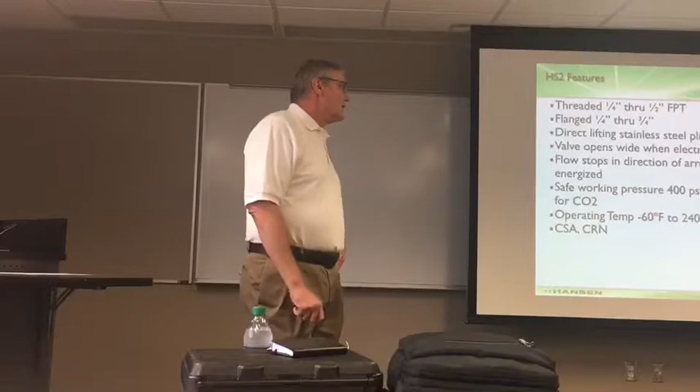The smallest one, the HS2, is available in 1/4 inch to 1/2 inch threaded connections, or we can do flange up to 3/4 inch. This valve is direct acting, so when we energize the coil, it lifts directly off the seat, and the flow is stopped in the direction of flow, shown by the arrow on the valve. Most of this is the same across our valves, so I'll talk about it once.

400 psi is our design pressure for standard ammonia products, and 600 and up for CO2 products. We'll usually handle minus 60 degrees Fahrenheit up to 240, and we have some certifications if they're required.

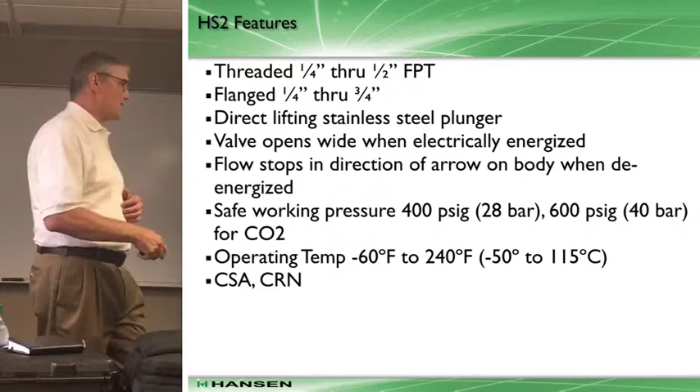So again, this little one is direct acting. Just so you get the lay of the land, the red side is the high pressure side, and the blue is the low pressure side. So we're stopping in the direction of flow. Here's the seat. This is all at high pressure. The spring force plus the pressure over an area causes a force downward to make the actual seating of the valve.

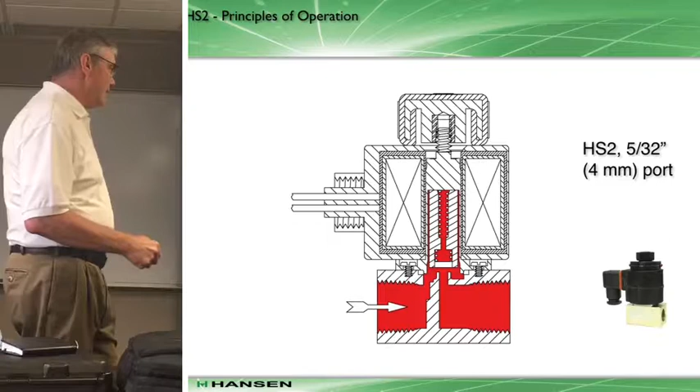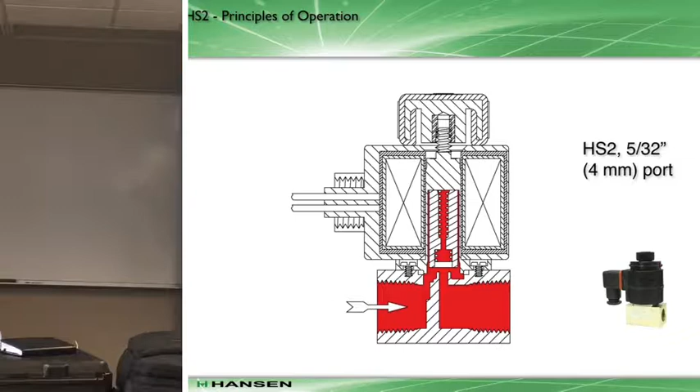Once we energize the coil, it creates that magnetic field, lifts the plunger up, and then we can have flow across the seat of the valve. Very simple, right? Direct acting, nothing fancy. You get it energized, it makes the electrical field, and you pull the thing open.

The HS6 is the next one, a little bigger, but we still come in as a flange valve at 1/4 to 3/4 inch sizes. Again, FPT, weld neck, socket weld type flanges are available, and it's direct acting. The seat opens wide when it's electrically charged, like we saw on the other valve, with flow in the direction of the arrow. Same kind of working temperatures and pressures.

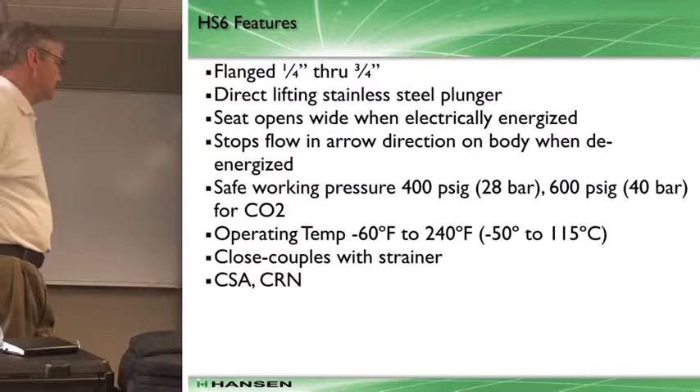But on this one we introduce a close coupled strainer on the valves. They have what we call long bolts through them that close couple the flange, the strainer, the solenoid, and another flange. So these are separate components - I've had people send me pictures asking what this part is. No, it's all bolted together as one piece.

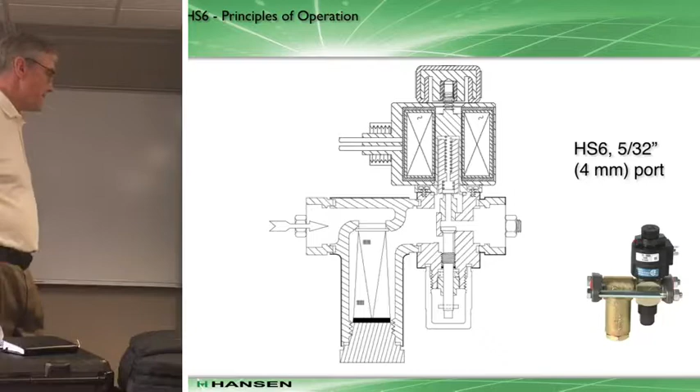Again, high pressure in the red, blue is lower pressure. Usually you need a minimum of about 2 pounds pressure differential to get these to lift. So it's stopped - spring pressure closes it, plus the force of the high pressure liquid causes it to seal.

Piloted around it? No, this is not a pilot, it's direct acting, not this one. This is just a liquid or a gas that would come in here. It would skirt - there's some clearance here along the plunger, and it gets up here to the top, and this is a hollow member where the Teflon sits, and it's all under this high pressure. It's just direct acting. Does that answer your question? Yeah.

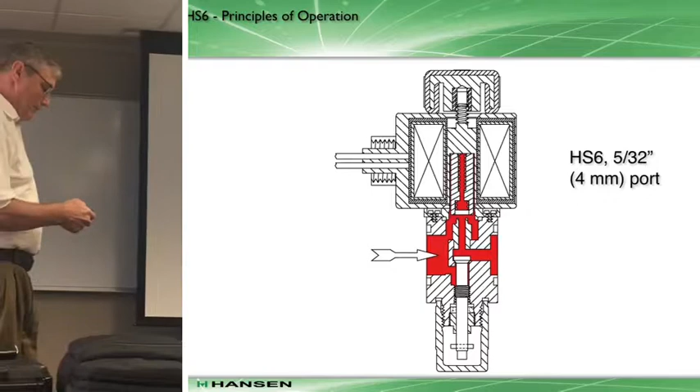So once we energize the coil, the magnetic field is generated, it lifts the plunger, and then my main seat to the valve is open, and I can get flow across it. Easy, right? Direct acting, it doesn't get much simpler.

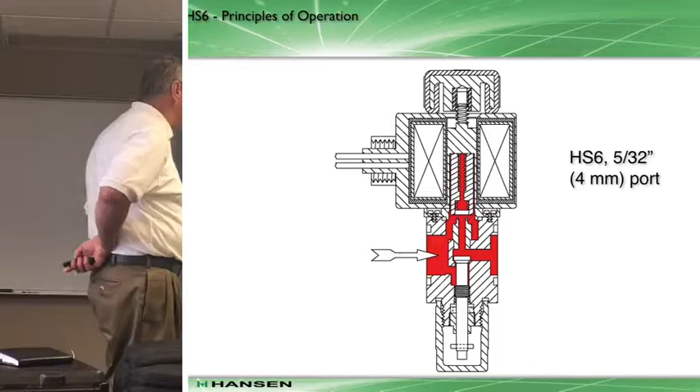The HS8A is a 1/2 inch ported valve, with 3/8 inch flanges to 3/4 inch, and welding line is starting to be available in this size, but by far most of the valves are flanged in these small ones. But here we start pilot operated operation in the valve. We could make all solenoids direct acting - we'd just need coils about this big to lift the plunger, 3 or 4 inches - but we just don't do that.

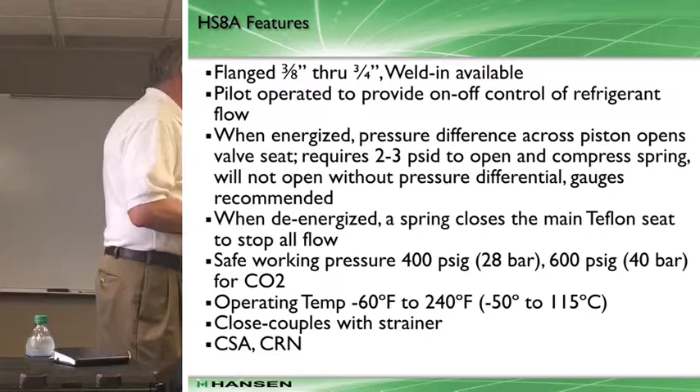We use a pilot operation, a small port to direct a much bigger port. So we'll see how that pilot operation works to control the on-off function. When we energize it, we create this difference in pressure, and it works and opens the main port—I'll show you how it works with the drawings. Then when we de-energize, the spring plus the closing pressure of the high side puts a tight seal on it. Same working temperatures and pressures as the other valves, and again, close coupled strainer on it.

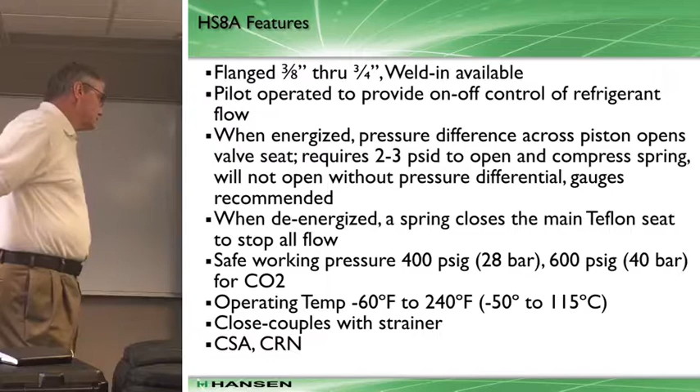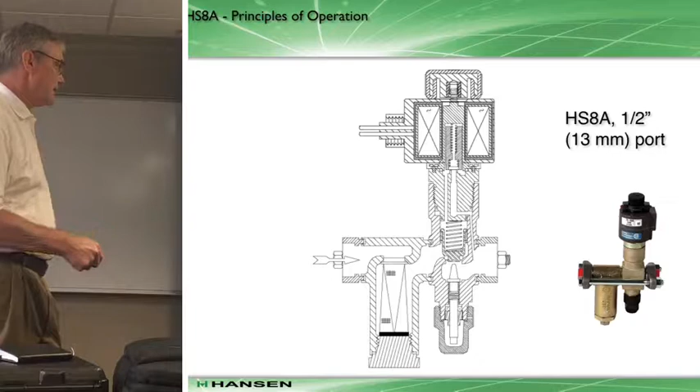So here it is, close coupled strainer. The manual stem is still on the bottom on this one, but this one, the manual stem works directly on the seat disc to lift it, and then we open the port to get your manual open operation if you're doing pump out or service work on the valve. So two things you'll notice: this is the pilot port, the small port, and it works to operate the much bigger, larger main port of the valve.

So again, high pressure in red, low pressure in blue. This is all at high pressure here. You can't see it, but there's a hole in the wall of this disc. So the liquid or gas pressure comes in here, fills this chamber up, and spring pressure plus this pressure, over an area, causes that thing to be forced down. It's all in this area at high pressure, but since this is closed, it's all going to stay seated. Spring pressure plus the high pressure flow keeps it closed.

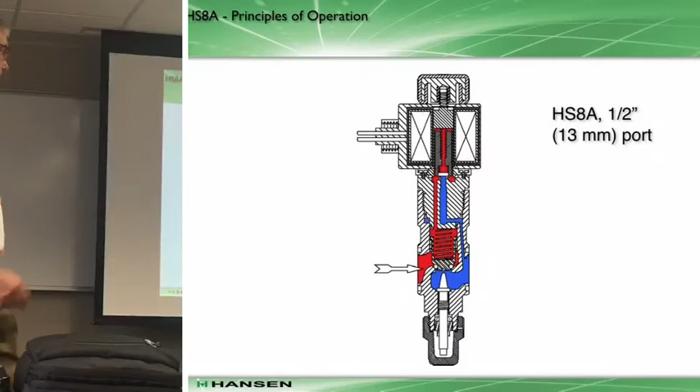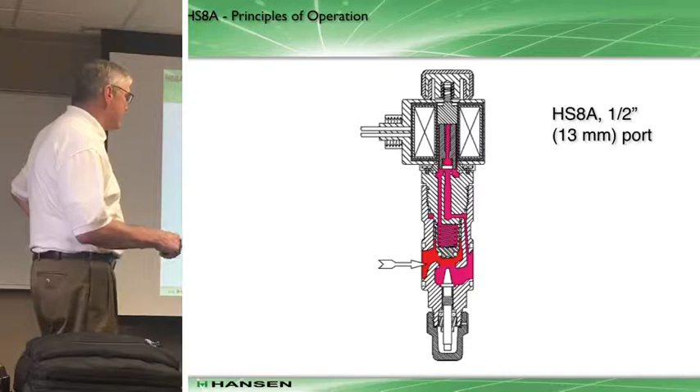Once we open and energize the port—energize the coil—this plunger lifts up, then it starts to open this, and it bleeds all this high pressure down to low pressure. So once that happens, we have to overcome the spring pressure, but the pressure on this side works on the areas here and forces the disc seat up, and then we get the main port to open. The next slide will show the next series of valves, the HS7.

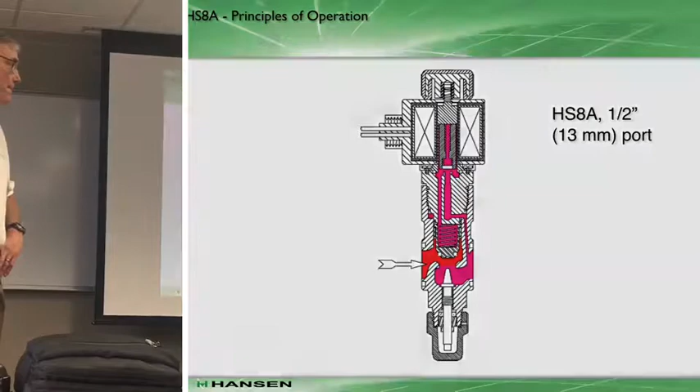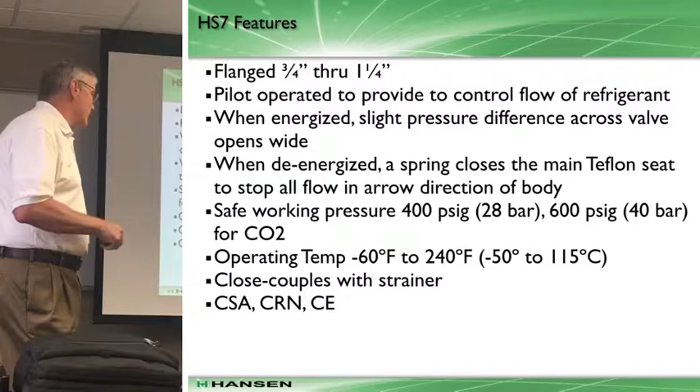We'll show it a little better because it's a bigger valve. But the important thing to note is, again, we've got to get things right at my pilot operation to make sure my main port opens up. So all the rest of these are pilot operated type valves: energize, slight pressure across the valve, make it go wide open; de-energize, the spring plus the closing high pressure force closes it up. 400 to 600, minus 60 to 240, all that stuff stays the same, and we're still providing close coupled strainers.

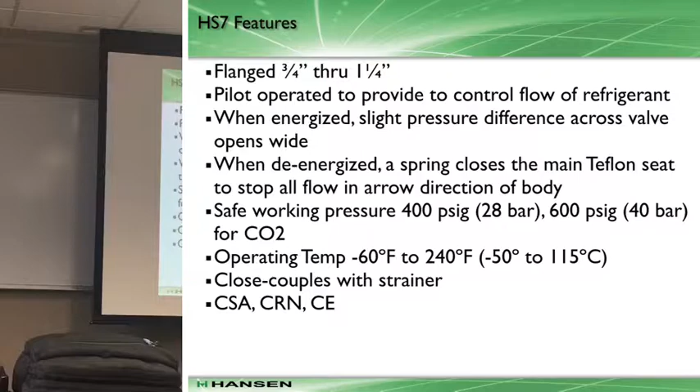Wrong button. Come on, baby. Doubled it. Patience. There we go—technical problems. Got to get these buttons right and get it facing the right direction.

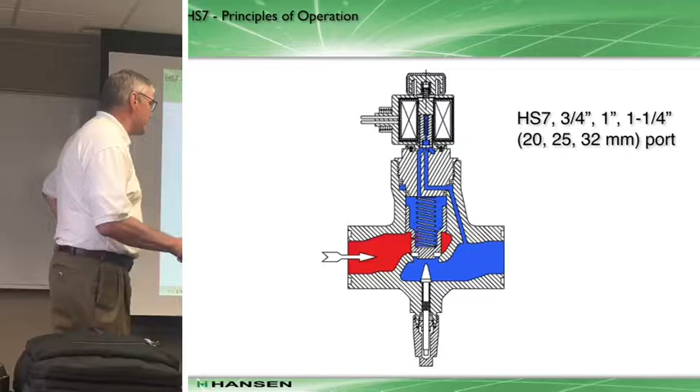But once we energize it—energize the coil—we lift the plunger up, it bleeds all this volume of gas or liquid pressure down to the low side. And then my high pressure works on these areas here to start lifting the seat off the main port. So this area and this area overcome that pressure, overcome the spring pressure, and then it lifts and my main seat gets open.

So pretty simple, right? We got the internals pretty much down. No questions? And what valves are these called? These are the HS7. Solenoid valves, is that what you call them? These are all solenoid valves. So we're using an energized coil, and it's simply an on or off operation. Energized, the valve is open. De-energized, the valve is closed.

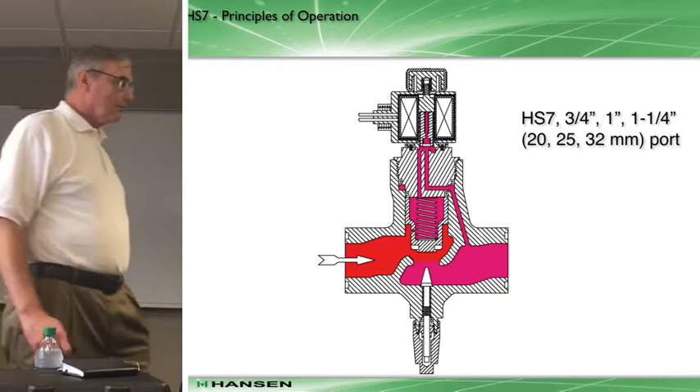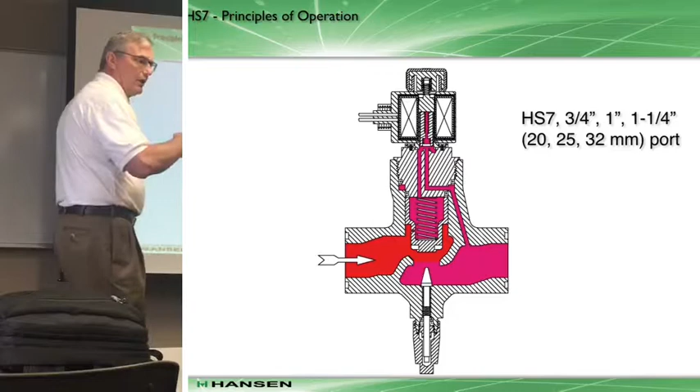So it's just a tiny little bit of lag between the time you can feel that solenoid pop, but you've got this port, they've got to equalize, but it's pretty quick. If it's a real small difference, it just needs 2 to 3 pounds to overcome the spring pressure—if it's right there at 2.5, it'll take more. In this one, like you saw, the HS7 and the HS8, there's a bore and you've got walls here, so there's more friction in these, and if there's dirt or debris or cold oil, all that can add more time for it to open up.

Come on, work with me. The

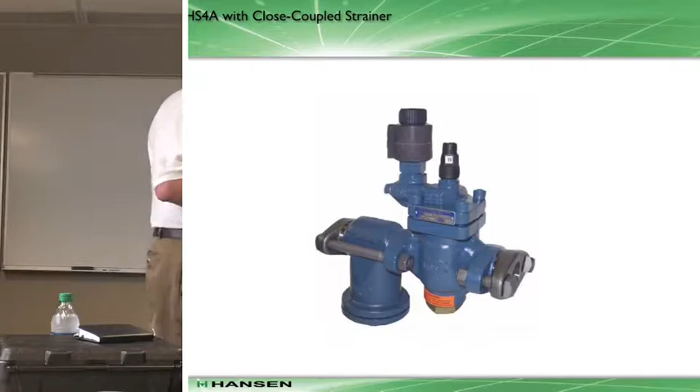The HS4A is probably our workhorse of the industry. If you're out there, you probably recognize this valve, and it shows it with a close coupled strainer. Solenoid module is up here for the pilot operation, and the big port is down here.

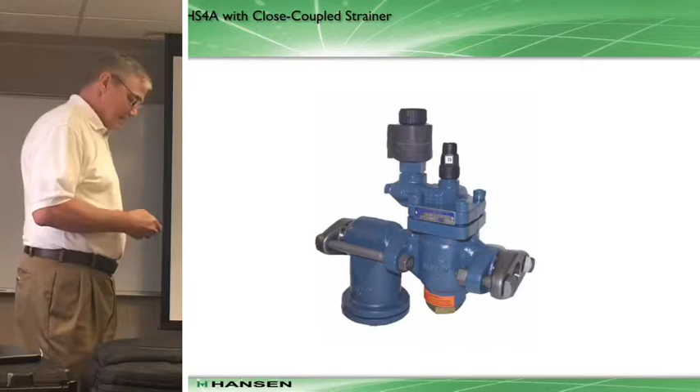I think I gotta go back one. Let me update, change the batteries. Technical difficulties, but darn it.

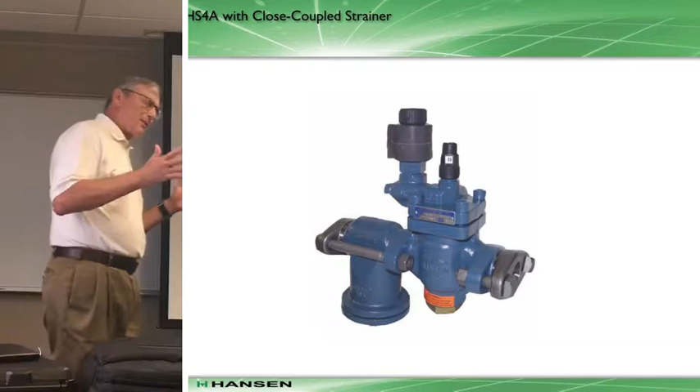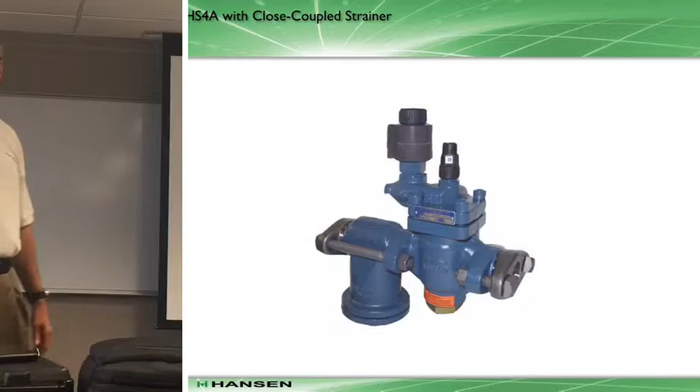You got it going? Seems like it's working. Okay, we can switch gears.

Manual stem, we go from the bottom up to the top now. Interchangeable pilots, you'll see when I start showing the regulators how similar they are, because they are all similar on the inside guts.

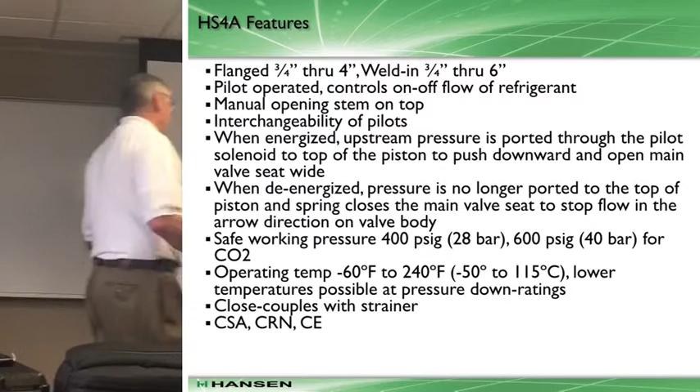When energized, upstream pressure is ported through the pilot like the other valves, and then we open the big main port. When de-energized, we take away the pilot pressure to the main piston. You'll see this, and we close the valve, the springs close the valve. Safe working pressures and temperatures are still the same, -60 on the low end, 400 on the high end pressure-wise. And again, like you saw in the picture, close coupled strainers.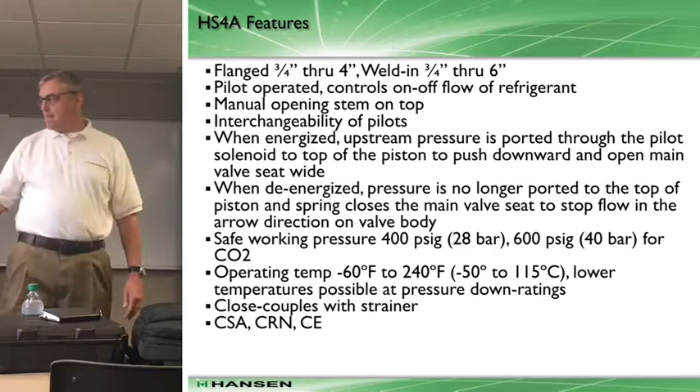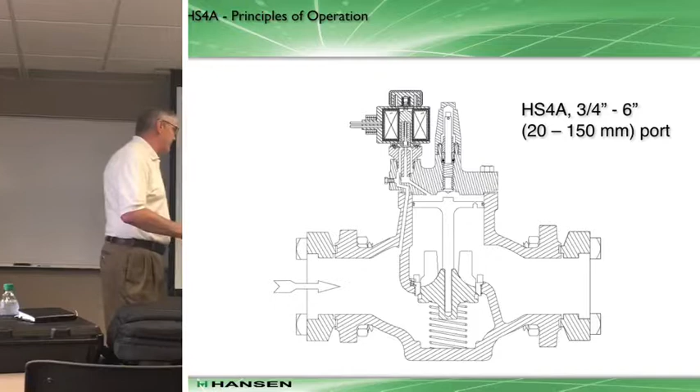Like that, we saw that picture. So here's what it looks like on the cross section. Flow is this way, directional arrow is cast into the side of the valve. The pilot passageway, the solenoid module like we saw on the other thing, the seat up here, and it ports to a much bigger piston area, which controls the main seat down here, and we'll see how that works in the colored pictures here.

Again, red being the high pressure, blue the low pressure. High pressure isn't allowed through this port, so it can't get to the top of the piston. Once we energize the solenoid...

You want to switch gears? You want to switch gears? Would that be? Yeah, I don't know, I still gotta kind of point it that way. Okay, can you just turn it this way maybe? That's the computer screen, so it's like over here maybe? I think it might work better.

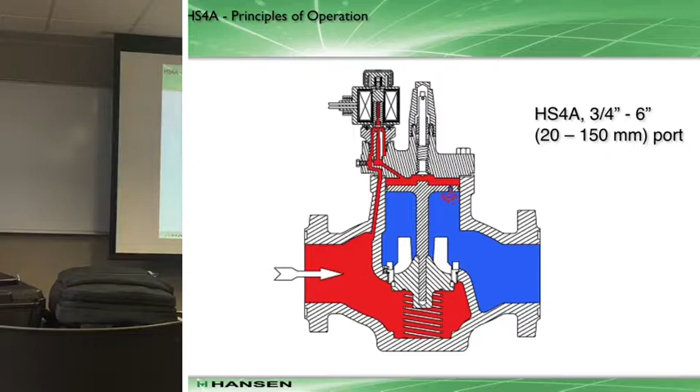So once we energize the coil like the other ones, right, we open that pilot port. Once we open the pilot port, we can get whatever fluid, liquid or gas, up to the top of the piston, and we start putting pressure on the top of the piston to open the main port. So once we get that flow, we start pushing it down. It opens the main port. See here, we can get flow across the valve.

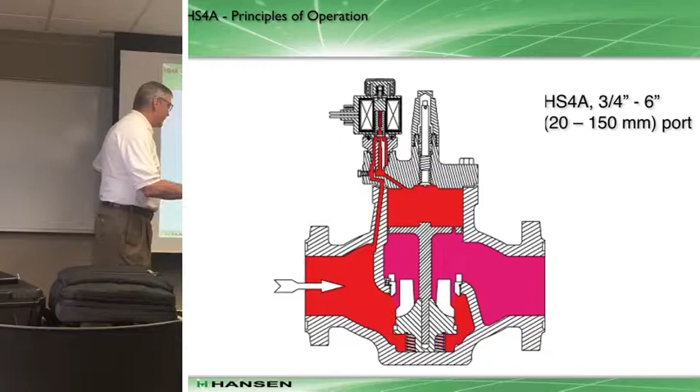Any questions on the operation of those valves? We're using a small port for the pilot ones to control a much bigger port. Putting pressure on either the disc or, in this case, this piston is connected to what we call a V port, and we're pushing that down to get it to open the main port. And then the direct acting, like we saw, just a straight plunger on top of a seat, and we lift it with a magnetic field.

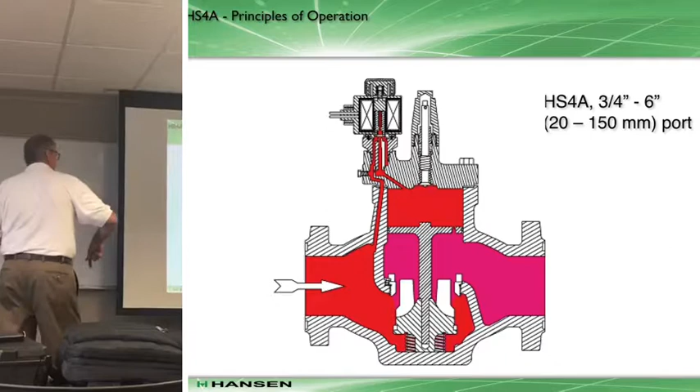I got a question. Go ahead. What direction does the manual opening stem? What's automatic, what's manual? Oh, good point. Clockwise in is the manual. Counterclockwise out is the automatic. On all of our valves? Yeah. Thank you, good reminder.

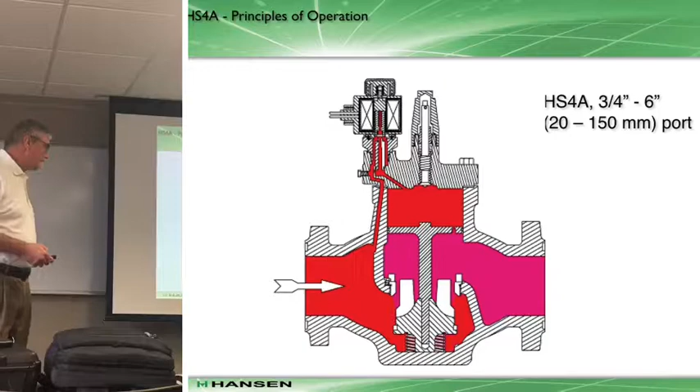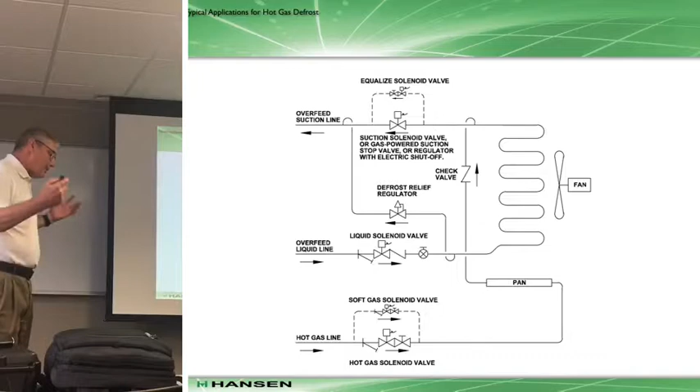So some application, typical air unit here with hot gas defrost. I like to start with the direction of flow, starting with the liquid. Most of our big evaporators, coolers and freezers are liquid overfeed type, so we're overfeeding liquid to keep the surface of the evaporator wetted because we get better heat transfer. We get better heat transfer, we need less coil surface, right? So that's principally what we're doing that for.

But we have typically on a liquid inlet line some type of stop valve here, a strainer, a solenoid, a check valve, and another expansion valve, right? So we start feeding liquid into the evaporator coil room, we get this all wetted, we provide a fan on it, it moves air across it. You got convection heat transfer, it boils some of the liquid off. We bring liquid and whatever vapor is boiling out of the suction line.

So that's normal evaporation, right? Once we go into defrost, we typically would turn the evaporator liquid line off, keep the fan going so we can get some of the liquid to boil out. We want most of the liquid out of the coil. And then once that happens, we will close the suction valve and then we'll open the hot gas line.

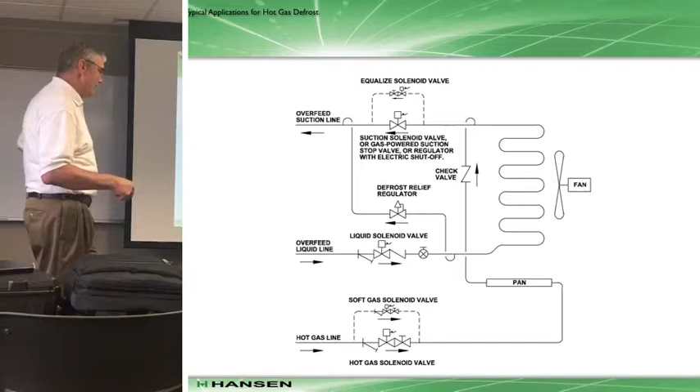We heat up the pan first so we don't get ice mountains in there, or bridging between the pan and the coil. We want that to be the hottest part of defrost. And once the hot gas goes through the pan, it goes through a check valve and starts going into the coil. Can't go this way, this is stopped.

So we start feeding hot gas in there, and we know we got hot gas, high temperature, high pressure gas, cold room environment. We build pressure on this space using a defrost regulator, which is typically set about 70 pounds, which is about, what, 48, we said yesterday, about 50, 45, 48 degrees Fahrenheit, and it will regulate.

So what we want to happen is we bring in hot gas, we know some of it's going to condense, because we're in this cold area, but a lot of it's going to be used to melt ice, which is going to cause it to condense too. So we want to move that liquid and gas out of there so we can keep bringing new hot gas into it, because it's got the warm air. If you remember our heat, most of that heat we're getting, is it sensible or latent? Yeah, it's latent heat. We're condensing a gas to a liquid, that's latent heat.

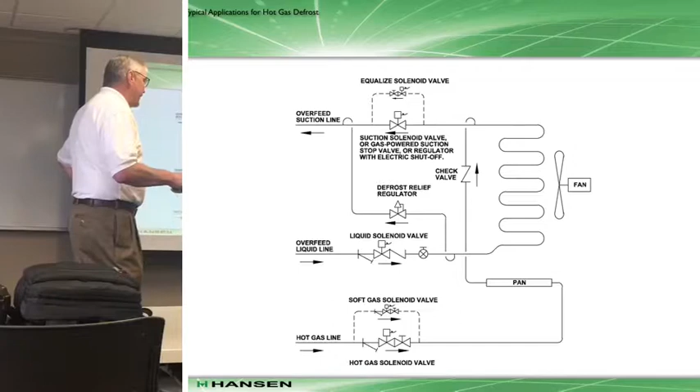So once that happens, we want to get that out. See what happens if this doesn't work, and we don't get it moved out, we get liquid landing here, and then it doesn't defrost, and we get what we call bridging between the pan and the coil. That's what we're trying to avoid, because once it bridges to the pan and the coil, the next place it's going to bridge is to your floors and your other product or whatever is underneath it.

So we're going to use liquid line solenoid, hot gas solenoid. You could use a gas-powered suction stop valve. You could use a solenoid if it's at a higher temperature typically, and then a regulator for this type of evaporator system. And that's pretty much a bread and butter setup.

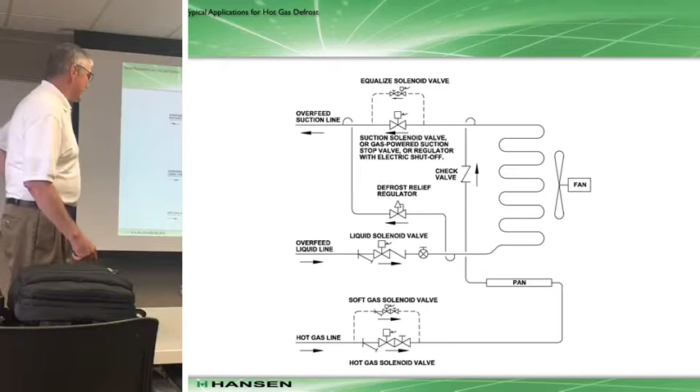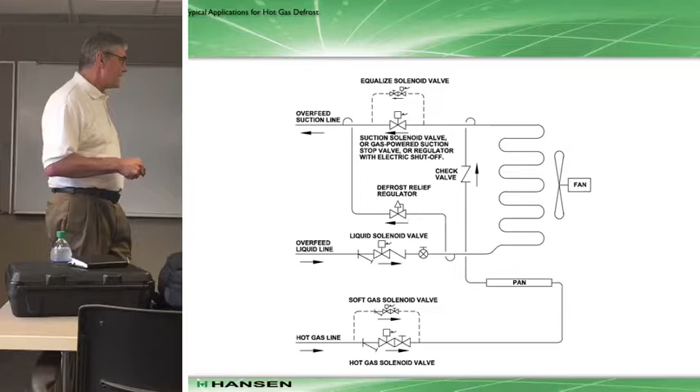One point of thinking, once you do come out of defrost, if you're using a specific kind of stop check, we want to have an equalizing line around it, because what can happen here is we get liquid and gas coming out here in normal operation. Once we shut this off, we bring this coil up to 80, 70 pounds.

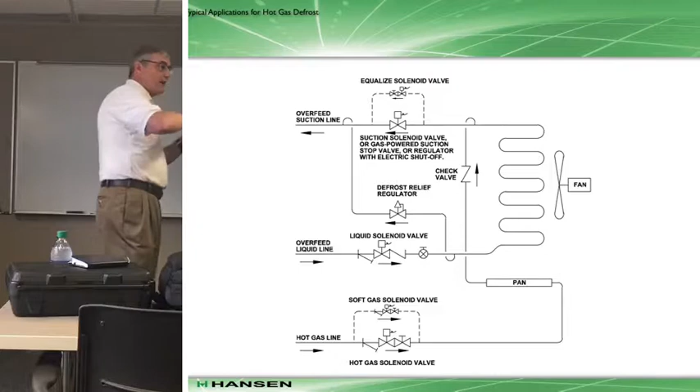And I'm bringing that back here. Once I get this defrosted, I gotta go back into refrigeration. Well, if this is at 70 pounds and I pop this valve open, it's like a cannon, because in those lines, if they're not pitched right or anything, you got like a wetted perimeter, what they call, part of that is wet. And just like on any lake or ocean, you get a gas moving across it fast, what happens? Wave builds, and once that wave builds, man, it's a nice hydraulic shock right down the pipe.

So we try to avoid that by equalizing the coil close to the suction pressure, then going wide open. We'll show you a valve that can do that all internally equalized. Yeah, give me a go.

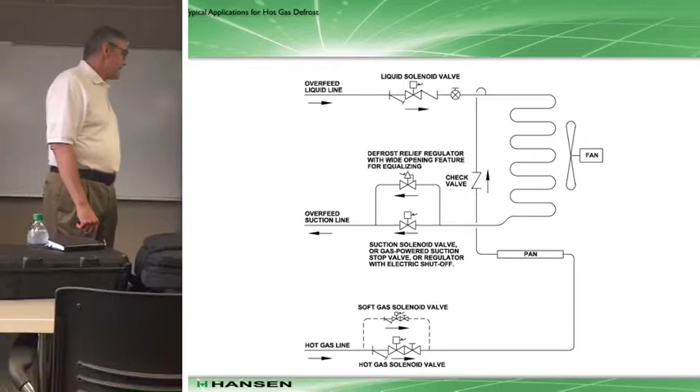This is a hot gas setup where we're going to use a little different approach. We got hot gas with the soft gas, and top feed versus bottom feed: liquid solenoid top feed coming in, bottom feed suction, and equalizing defrost regulator here. Again, this one we're going to use a soft gas. So we'll build pressure on the coil, starting with the soft gas, the smaller solenoid. Then we'll go to a wide open, bigger solenoid to really start getting the heat to the unit.

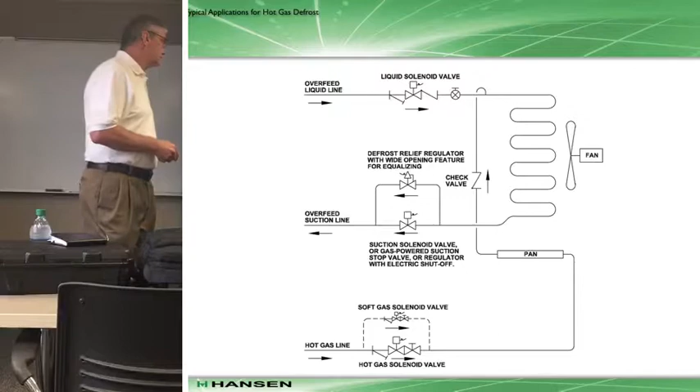Okay, I think we go on that one.

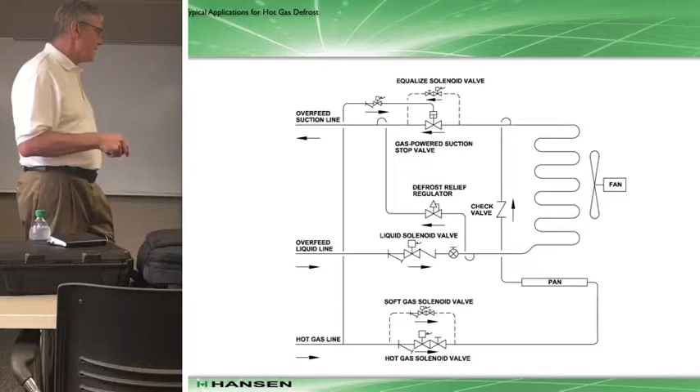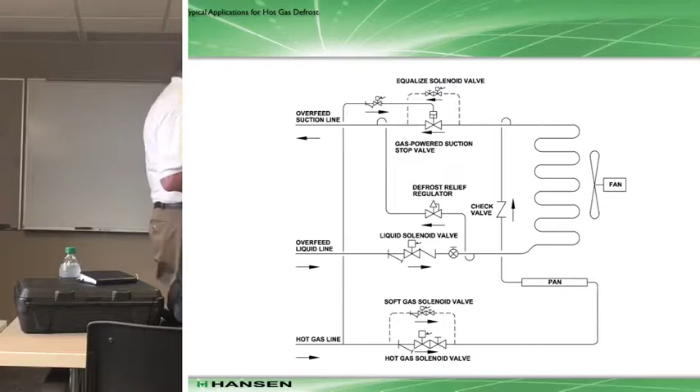Okay, any questions on the application stuff?

Seen them all. This one's a little different in that it uses a defrost condensate drainer rather than that regulator going up here. It's pretty efficient if we use all that latent heat, turn it all to liquid, drain that liquid out, and bring it back to suction.

Okay. But same type of thing. Bringing hot gas in, liquid recirc normally overfeed for the evaporator. Once we do that, turn it off, hot gas starts coming in.

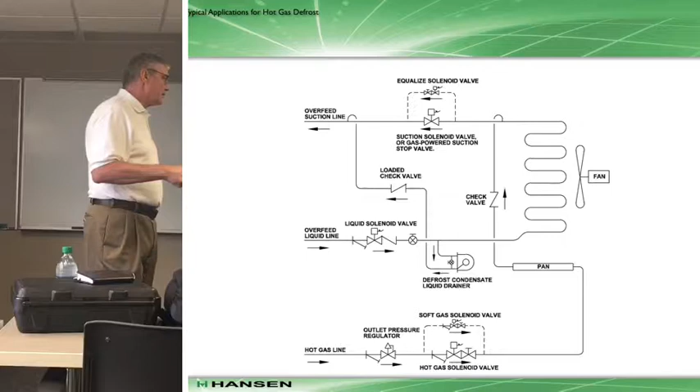We're going to close that one so we start building pressure. The pressure of the gas, it turns back into liquid. The liquid is drained out through the drainer and then back to our recirculating vessel until we're done with defrost. Bring in soft gas.

On the end of the defrost, once you get it all done, you're going to equalize, turn off your hot gas, equalize, bring it back down to pressure, and then when it sits down back to pressure, open a gas suction stop valve or solenoid valve, whatever type of stop valve you're using.

Okay, Harold. Does anyone use liquid drainers? Most, you guys got drainers? But it's not for evaporators. Okay, yeah, some other. Yeah, it's different application.

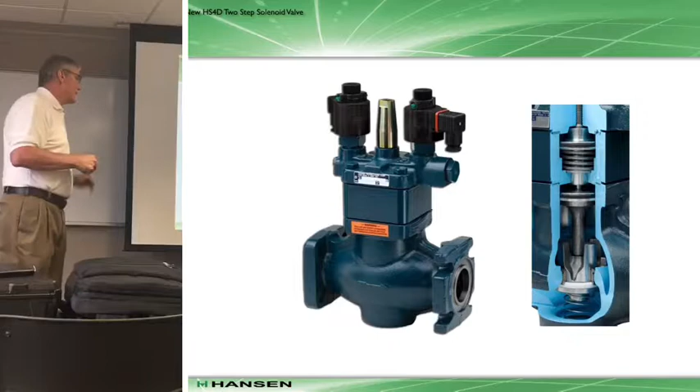Okay. This is our two-step solenoid. We'll show you how that works, but essentially it's got about a 10% opening and then a wide open feature.

And again, we call it the HS4D for dual kind of positioning on it. It comes in a 3/4 inch through 4 inch port. We can get it welded, from 3/4 to 4 inch, but we also have the flange versions. It's, like I said, 2-step dual operation. So there's 2 positions for like a soft opening and then a full open. Of course, all our valves are heavy duty, same type of pressures and temperatures.

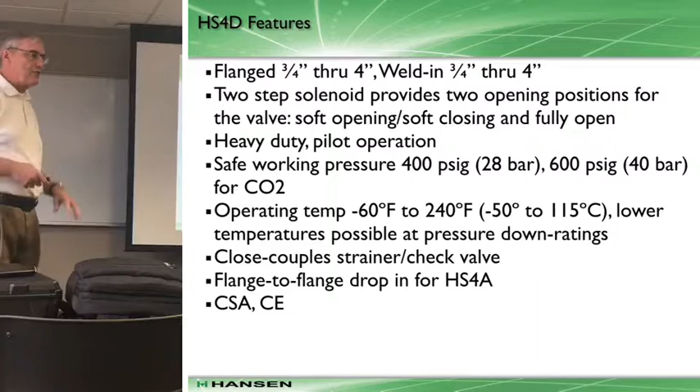We can close couple of strainer. If you have something in the field where you think you might need this valve, it could drop in the same flange to flange size as a normal solenoid valve.

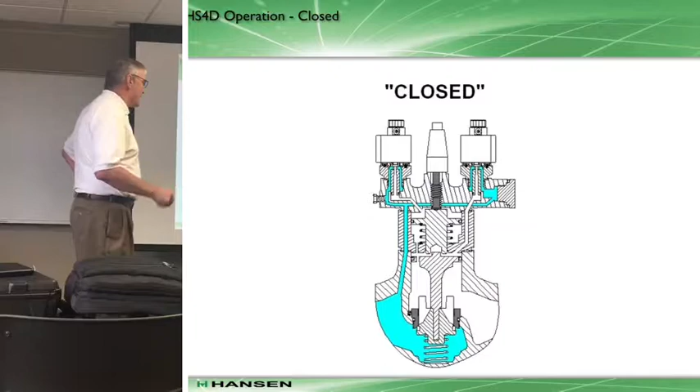So in the closed operation, again, this blue is the high side now and this is the low side pressure. Blue closed, both solenoids are de-energized, no power to them, so no gas can come to here or liquid, no gas can come to here. Once we decide we want to do it as a soft or partial open, we energize the coil, just like the other pilot operations. We open that port, that pilot port up, and it ports gas or liquid right to the top of this piston, right?

So this piston has a hard stop in it, so it pushes to that point and it goes only partially open. So there's 2 positions here. There's the upper piston and a lower piston.

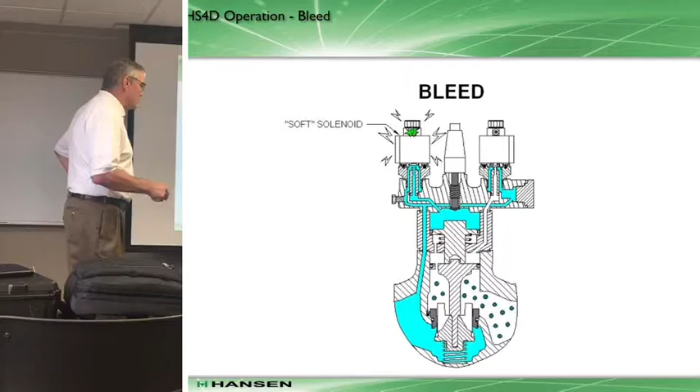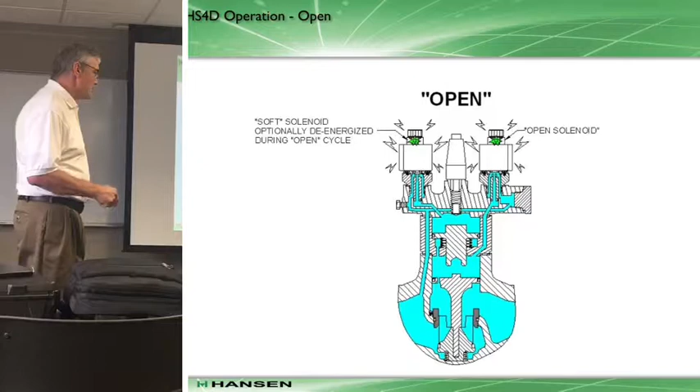Once we energize the full open piston, that port is open, right? We get gas or liquid ported to the top of this piston. It separates and it pulls or pushes the piston and V-port wide open. So we get a wide open flow.

So probably the biggest application for this one is, we can use them on liquid lines, but typically when you have real cold coolers, freezers, you usually try to go with the hot gas 2-step. So you'll bring this thing slightly up to pressure. Because again, if you got high pressure gas here, whatever, 150, 110 pounds, and it could be kind of warm, right? It's coming off your condensers. You don't want to shock your coil, and if it's at -40, I mean it's pretty good.

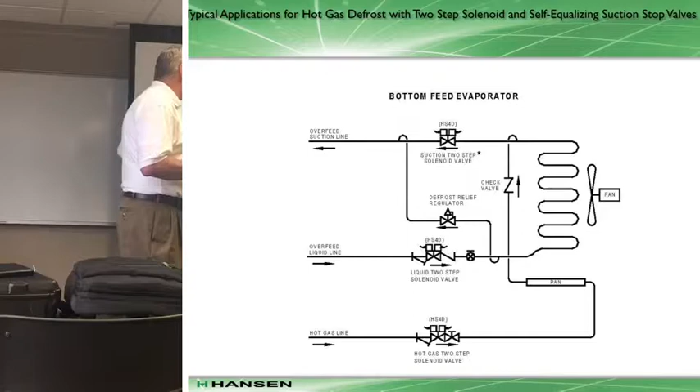So we use the soft-open feature to bring this up to pressure and temperature slowly, and then we go wide open and we start really giving it the heat.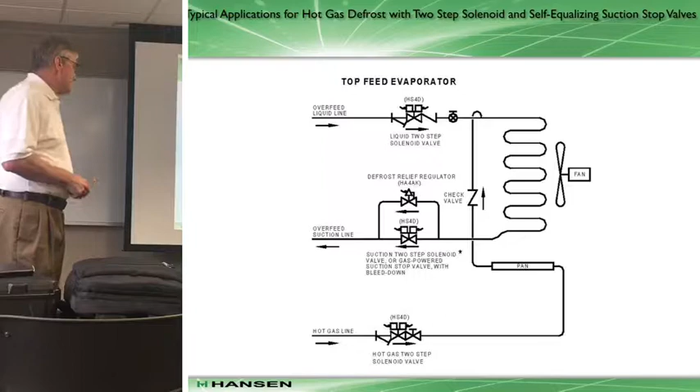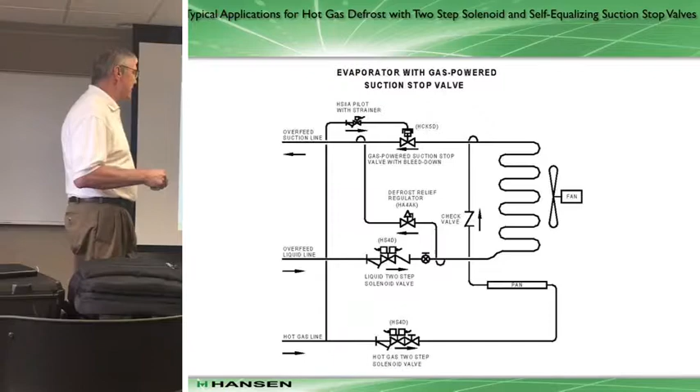But you could use them in other applications. You could use it again when you're coming out of a defrost cycle. Like I said, you want to build frost on the coil, so you might want to start your liquid overfeed on a soft setting, so you don't rush things into the coil. Slow is good in big industrial refrigeration, right? Do it fast and bad stuff happens to you, unfortunately. So we bring in liquid slowly, we start building some ice on the coil, and then we can go wide open and start our whole evaporation cycle.

So service of these valves, again, like Harold said, the manual stem, either top or bottom, you turn it clockwise, you're always in the manual position. You're manually opening it. You turn it counterclockwise, you are in automatic, so the valve will operate the way it should. Energize the coil, it's open on a solenoid; de-energize, it's standing closed. If you don't have the manual stem all the way out, it can hang up and you'll get some partial flow through the valve. So if you've got leaky valves, and someone's been doing service or something, that's the first thing you want to check, to make sure the manual stem's in the right position.

And then on the solenoid pilots, we sell these as kits. You wouldn't just say, I need a new tube or plunger, and I'll show you those parts - you buy them together and replace them all. They work together, you saw how the plunger slides up and down the tube. They both wear together, so you replace them both, and that's the way we sell them together.

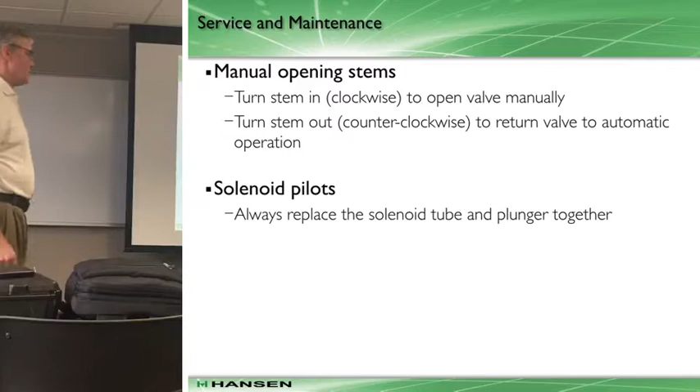Causes of failures - this is the partial list, right? Debris embedded in the main valve's Teflon V-port seat. So we've got Teflon sealing here on the white, and if you embed material in there, it's not going to work properly. You could get a big chip across it or something, and it doesn't work.

I told a story yesterday, I'll tell it today because I like this story. I went to a customer and he said, all your valves are leaking. Well, how many have you got? 40, 50 up on the roof, they're all leaking. I said, well, I'll come over - when do you want me next week? We'll go take a look at it.

So I get over there, it's in Michigan, and we said, well, let's take a valve apart. So we pump out the liquid and open up this part, the valve, and we look at this piston - on top of the piston there's just black goo all over. I'm like, that's not how we provide it from the factory, that's not our material. You look at it and you're like, oh yeah, probably right, it's not yours. So, well, let's pull that out. We pulled out the piston, we pulled the V-port out, and the V-port has got little tiny pieces of grit impacted all over it. It's not white anymore, it's just gray, and all those little ridges and valleys acted like a metal seat and had all these pathways through it, and it leaked all the time.

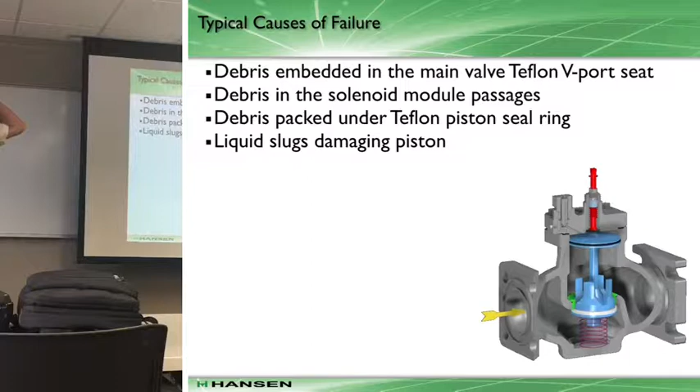Pipe probably has some stuff in it. A contractor admitted to me that they bought that pipe from somewhere like Czechoslovakia in 40-foot lengths to save money, but it wasn't clean, so they devised a whole little liquid filtration system to knock out all that stuff. But if you had the resources and didn't want to buy all these, you could.

This is simply a 45-degree angle, and they chose to try to machine some of these. They'll take a little Teflon off and have them reseat perfectly again, rather than buying all new pistons. But that's my little sidebar story.

Debris in the solenoid module passages -- all these little passages that go up in here. Again, if there's cardboard, wood chips, dust, whatever you've got laying around, and it gets those plugged, all bets are off. You're not going to communicate the pressure you need up to the top of the piston, and it's not going to open.

Debris packed under the Teflon piston seal ring. We have what I call a lip seal or cup seal -- it's got a spring backing in it, and shoulders. We've got a picture of it coming up. The shoulders make a seal and can wipe away grime, but it can also get some stuff packed in there. If it's not sealing right, it can cause bypassing, and then you won't get it fully open -- it might go partially, but not fully.

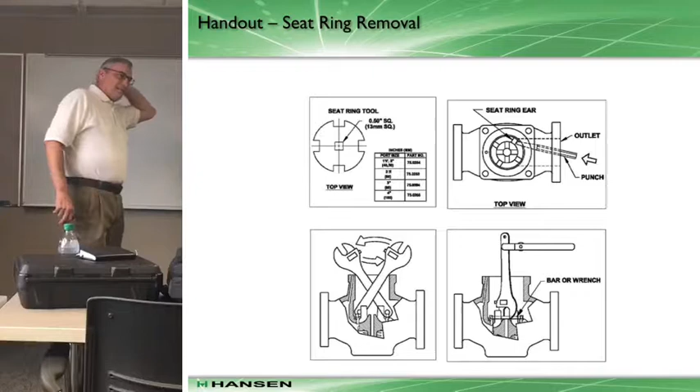And I crank that stem in and out, right? Give it a crank in, see if there's any debris or crap holding it up. You've got energy, hopefully it freed up, it's moving manually, the spring's moving it up and down, and you're moving it manually down.

Then if you try to power it up and it's still not working, what's next, right? Then it's damn -- it's nothing simple. Then I've got to get my arms dirty and start pumping stuff out, look inside the valve for those kind of things -- is there debris, what's hanging it up, that kind of stuff. Call Hansen at that point and tell them it's a piece of crap valve with this.

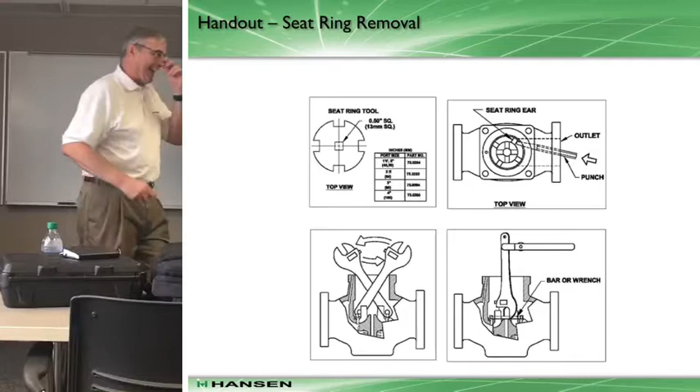No, what's our number one phone call, Harold? What's the right part number? What's the right part number? You can call us for that.

So in the bigger valves -- well, even in the smaller valves, 3/4 inch and up in the welded lines -- we have a removable seat, because that valve is welded in, so we want to be able to remove the seat. The bigger valves start being removable at 2.5 inches -- no wait, it's really 1-1/4 inches and up. Here it is right here.

So we have a tool to remove it, because there's 4 pins in here that sit up, and we put this tool over it on a 1/2 inch socket drive, and then we can turn this out. When you look down in the valve to remove the seat, there are 2 places for a bolt -- the bolt stops this seat ring from rotating, so a bolt will be in one of those 2 positions. If you want to take that seat ring out, the first thing you do is remove that bolt. It's got 2 positions so the pins don't hit it -- I can't put the bolt right here, I've got to put it here. So pick a point, take it out, and we'll replace it once you put a new seat in.

This is the best method that I found. If you can take the valve out and use a drift pin on it, you can get it to move and it'll come out.

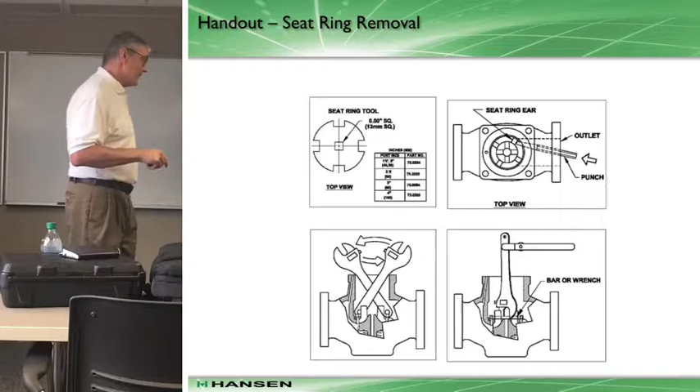This method here is what I call the knuckle racker. If you're gonna try this method, please wear gloves, because it can skin your knuckles. You can come up bloody on that method.

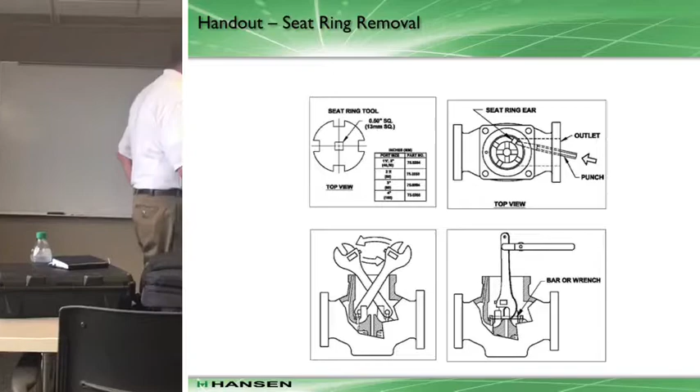But this works pretty good too, an improvised bar. You fit a bar across these pins, get something down in there and get some torque on it, it'll take it out too. This method over that one, I guess, if you don't have the right tool with it.

So we provide all kinds of different coil voltages: 115, 230, and 24 volt AC, and we also have a 24 volt DC coil. Our typical coils are watertight enclosed in Class F, and they meet these NEMA 3 and 4 ratings, or IP32. Our standard coil is a 1/2 inch with 18 inch leads to wire it in.

We also have a DIN type of connection available for this type. And we have a quick disconnect plug, the DIN plug that hooks into the coil.

And I think we got pictures of them coming up here somewhere. Then we can provide what we call a beacon pilot light. It works with induction, so once we energize it, it's like a transformer. We power this up and the field energizes it, and these little LED lights go on. We can use those in all the AC connection types; DC, it won't work.

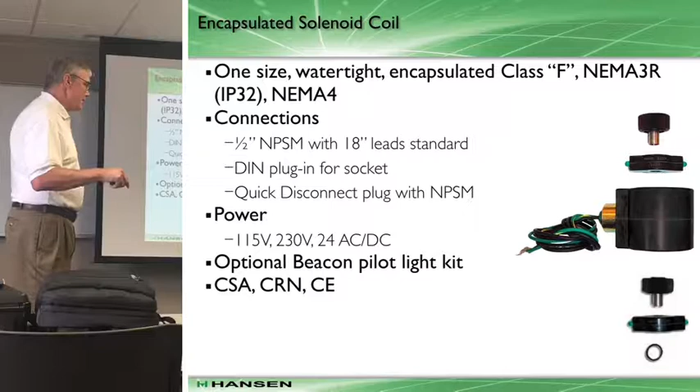The important thing to know too is when you're replacing solenoid coils, there's a ring on this nut, on this knob, and then there's an O-ring on the bottom. The O-ring goes on top of the solenoid tube plunger, and then these fit on top of it. These make a watertight seal, so you don't get moisture coming down to this part of the coil where it could rust the solenoid tube, and then you can't get the coil off and this thing starts getting ugly. So you want to make sure they're down to the snug point, not over tight, so you're not bulging the coil, but just tight enough to get a good seal.

What do you think about putting Loctite, or not Loctite, but like Never-Seez on them? Yeah, Never-Seez and all that stuff. I've never seen it done. Oh yeah, the guys we work with, they slobber that stuff all over everything and put it on what goes inside there. Yeah, the secret sauce of refrigeration.

Works pretty good, they come right off generally. My wife loves cleaning that out of my clothes. Oh yeah, it's good stuff.

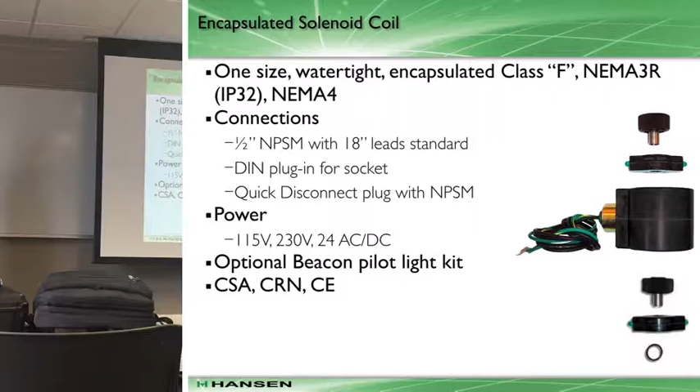And then we also use, at the factory for the O-rings, Dow 33, which is a low temperature grease that's always readily available. What do you lubricate your stems with? Dow 33, the low temperature grease we use. When we're assembling the valves, we actually coat the O-rings in that as well. Dow 33, write it down.

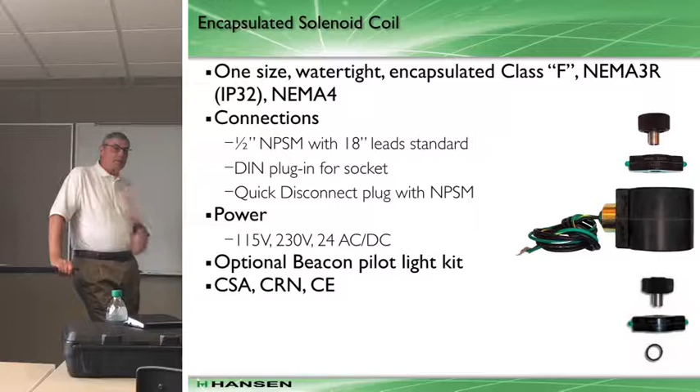Never-Seez, no, you can't- well, you can use it, just not the copper. Is that Dow? Yeah, Dow, like Dow chemical. Yeah, okay, gotcha.

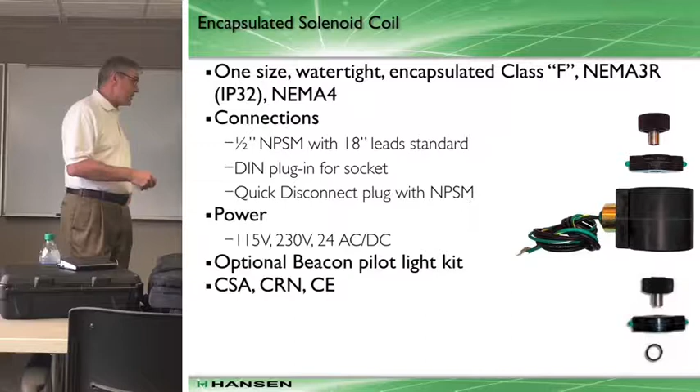So like I said, when you change a coil, or take one on and off for servicing, you just want to make sure you don't lose the O-ring and you get that seal component set up right so you don't have water migrating into the tube and rusting, making it hard to pull off the next time.